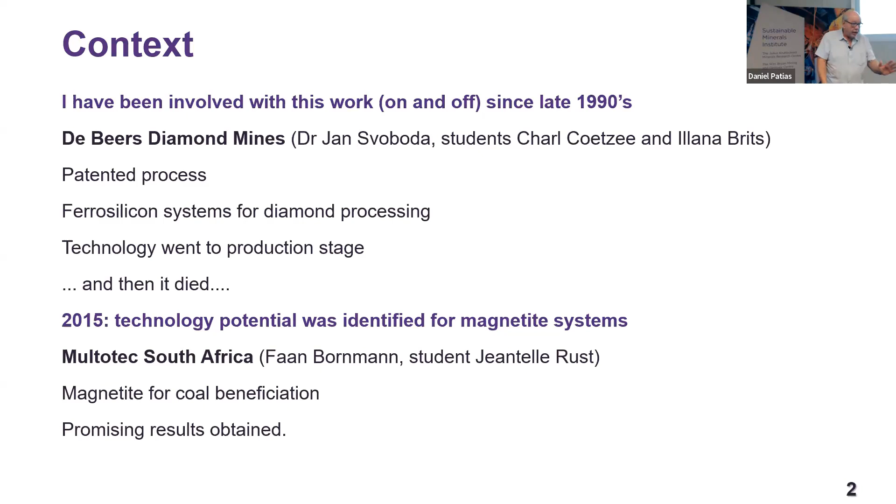And then we started talking about ACARP, and ACARP we applied with the help of Christian. We applied for the project and it was awarded. And the project kicked off 2 weeks ago, and that's what I'm doing here at the moment.

We are going to pursue this, what we learned in the past. We're going to show that and distill that and refine that.

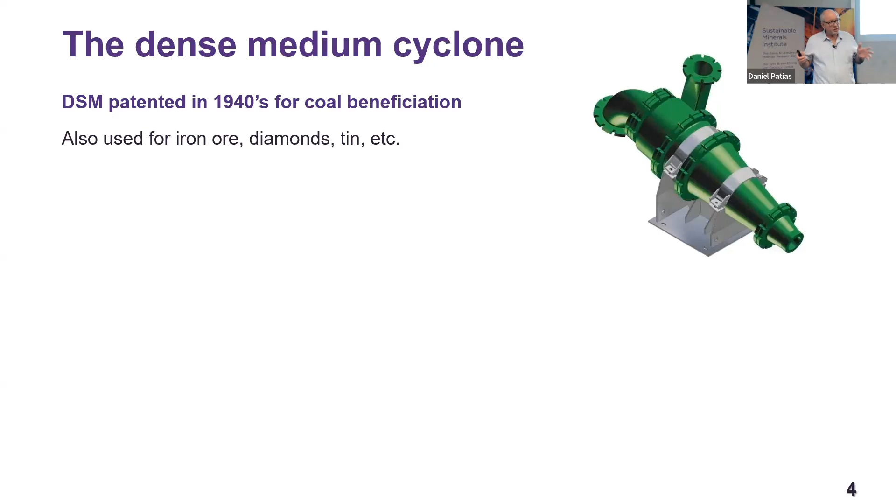Right, let's talk about the dense medium cyclone. Now, unfortunately, again, I see people here where I'm going to bore them with how a dense medium cyclone works. Hopefully, there are some people from other backgrounds who might not know all the buzzwords on a dense medium cyclone. Dutch state mines patented this in the 1940s for coal beneficiation, although it can be used for any dense separation or dense mineral separation based on density.

So let's, let me just see if I can, whoops, get the laser pointer going. There we are.

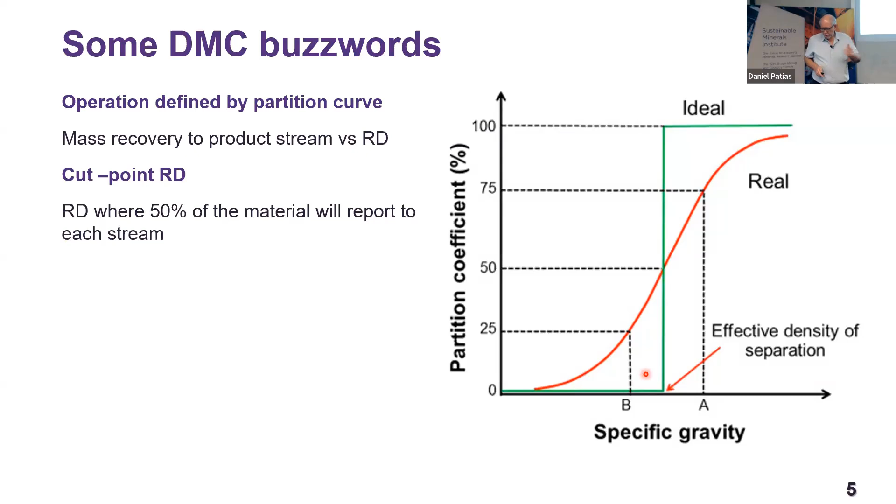So we've got various ways of defining the operation. The first is the cut point—that's the point at which 50% of the material, or material of that density, has a 50-50 chance of going either up or down.

The other is the misplaced material, which I've just shown you, and that can be defined by the EP. EP is essentially the slope of that straight part there, running between those two points, giving an indication of the sharpness of separation.

A small EP means the line is more upright—sharper separation—while a high EP means a low sharpness of separation. So a low number is good in this case, like a golf score.

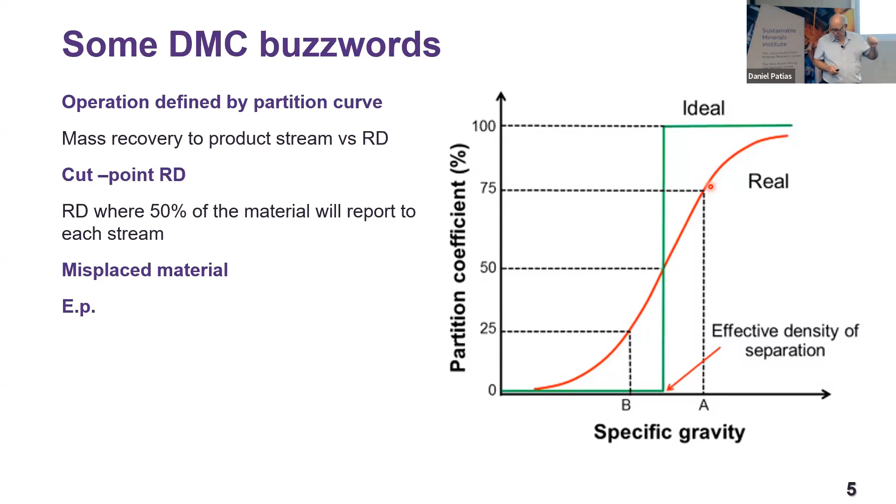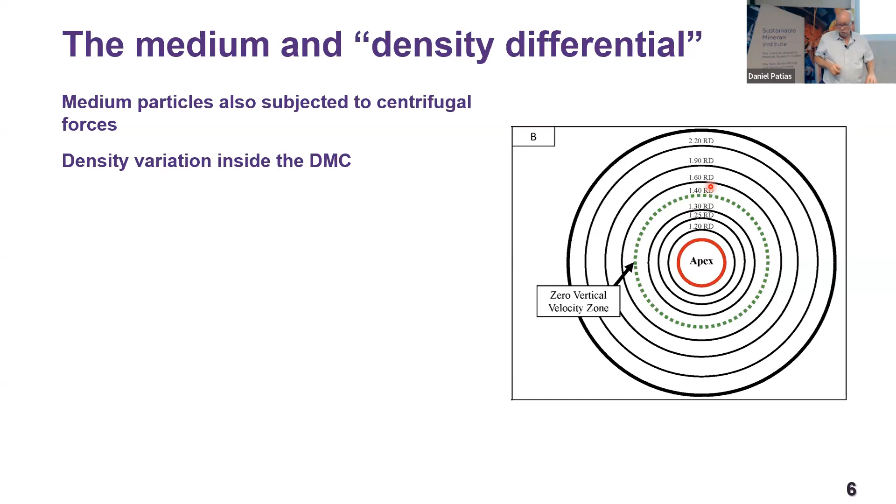Wear. That's what we found at the De Beers mines - there was a lot of wear in the cyclone because these middlings are just sitting in the cyclone, eating up capacity and not going anywhere. So there's this density variation.

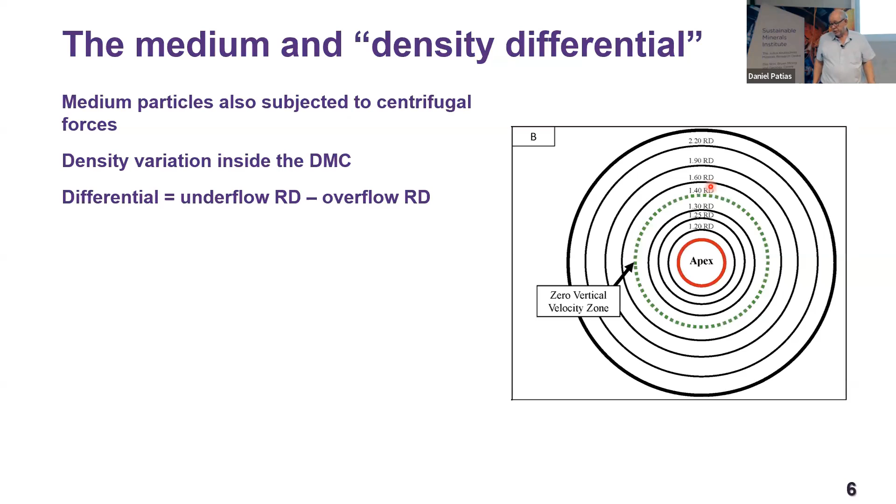Density differential formally is defined as the underflow RD, the high relative density, minus the overflow relative density. It's used as a proxy for sharpness of separation. Normal range is 0.2 to 0.5. If it goes higher than that, you've got a problem. If it goes lower, I believe you've got a problem too, Tim - you've got to help me on the low density differentials. But that is the normal operating range. And as I said, the middlings are trapped in that zone if the density differential becomes too large.

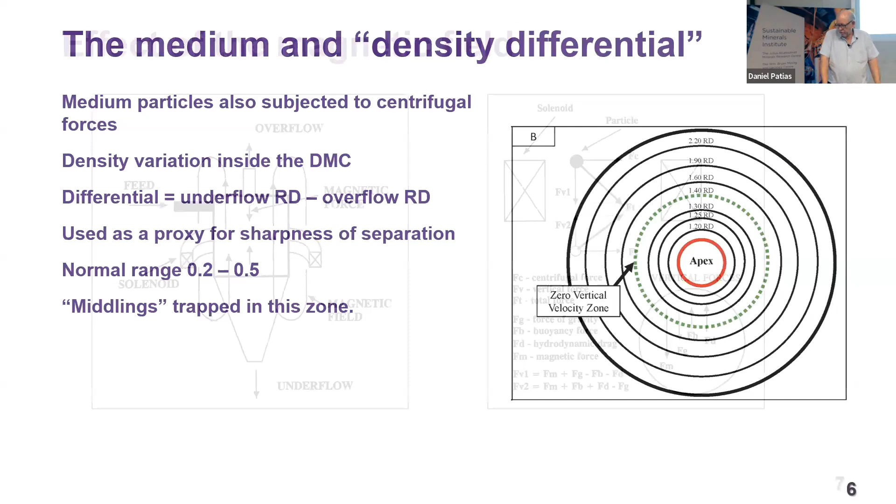Now what do we do with a magnet? This comes out of the first papers. What we do is take a solenoid, a magnetic solenoid or electromagnet, and stick it around the cyclone in some position - and the position is very important. I've drawn it here around the barrel, but actually it works best if it's a little bit lower down. We'll come to that.

That imparts a magnetic force on the magnetic medium particles inside the cyclone, and that gives you one additional control. It does affect it, and you can see the resultant force changes. So if I change the current going through the electromagnet, hence changing the magnetic field inside, the medium particles will behave differently. I'm hesitant to say better or worse, because that depends on what my setting is. So it gives us one more thing to work with.

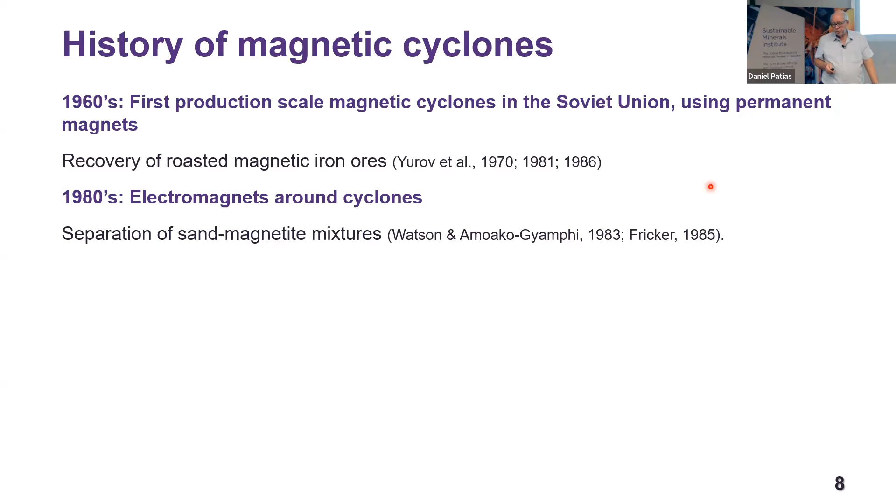What was found is that way back in the 1960s, they used a magnetic cyclone with permanent magnets in Russia, where they recovered roasted magnetic iron ores this way. They found that something happened - I'm not sure everybody understood what happened, but something happened. In the 1980s, sand-magnetite mixtures were separated using electromagnets for the first time. These are all the leads up to the work that we did at De Beers.

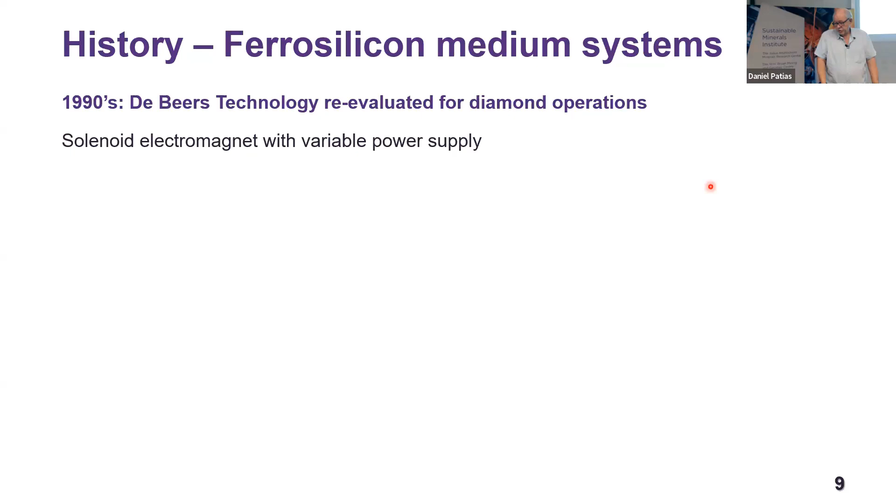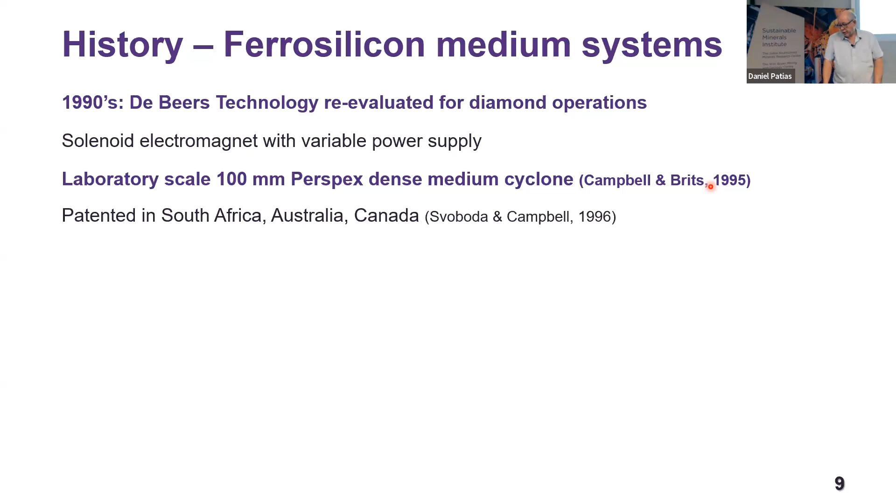So Jan Svoboda contacted us and said, listen, I've read about these things, can we try it? And we said yes. So we put a solenoid electromagnet with a variable power supply around, first of all, a 100 millimeter laboratory scale cyclone. I had a postgrad student there, and it was promising enough that we could patent this in three countries.

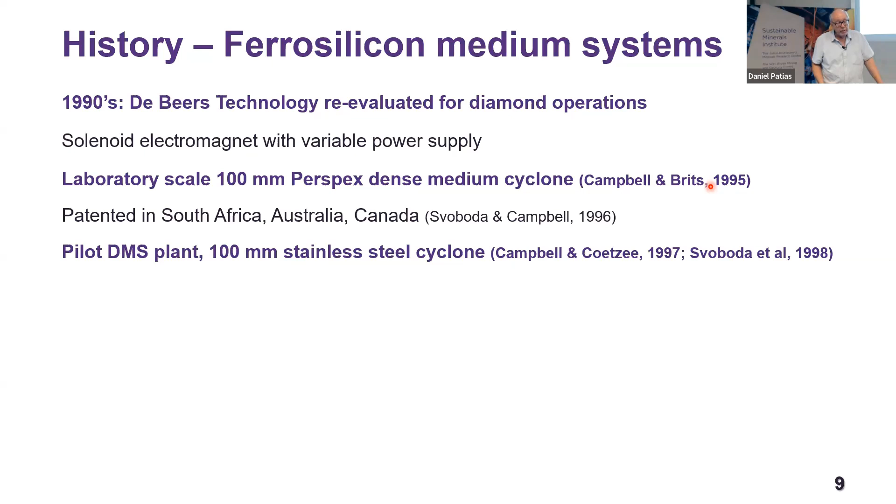Then we erected a 100 millimeter stainless steel cyclone at the De Beers campus in Johannesburg, and I had another postgrad student who worked on that as well. It's very important at this stage that your material of construction for the cyclone must be non-magnetic, otherwise it defeats the object. That's why we use perspex, polyurethane, stainless steel - and you'll see in the new cyclone how we manufacture that as well. We can't go with normal mild steel, and that's where the cost comes in. That's probably one of the issues to look at - the advantages versus cost of manufacturing, since it's not a bulk manufactured item, not for the bigger cyclones anyway.

Then this was implemented on the Koingnaas prospect plant. There was a bigger cyclone at 250 mil. It ran very well - again I had a postgrad student on that one, and it went to production stage, 510 cyclones, fairly big.

We manufactured non-magnetic stainless steel cyclones with ceramic linings. Once again, non-magnetic is the magic word there. And this ran actually very, very well. Similar cyclones were later used in the Botswana operations, and again it ran. And then for some reason, it just stopped.

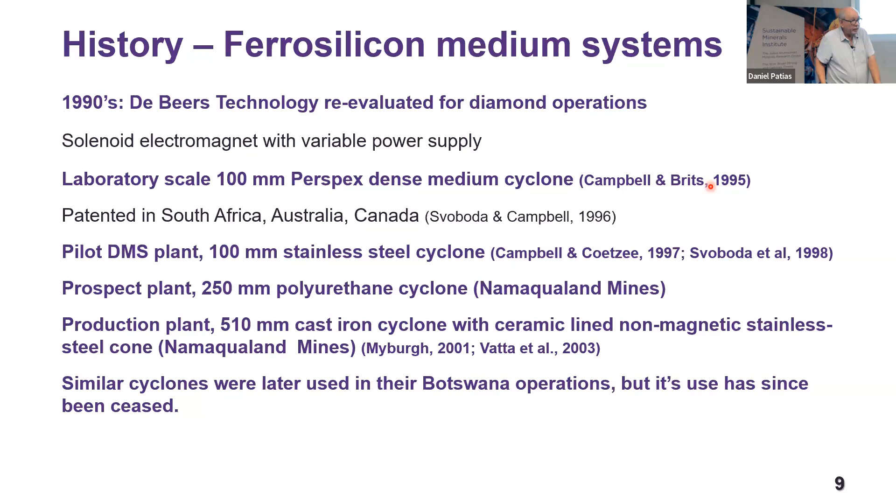I said just now, tongue in cheek, it's operator acceptance. I think it was more the cost of replacing these cyclones, because to have them made specially, I think that was one of the issues.

So the results were very, very interesting. We saw that the density differential could be directly influenced by the strength of the magnetic field, hence the amps that we put through there. And we tried the solenoid in different positions around the cyclone to see whether towards the cone it will work or not. All this work came out in a fairly nice report.

In fact, quite interesting, we could actually achieve density inversion at a very high magnetic field strength inside the cyclone, where you would have in your overflow a higher density magnetite than at the bottom, or medium at the bottom. Obviously, you don't want that.

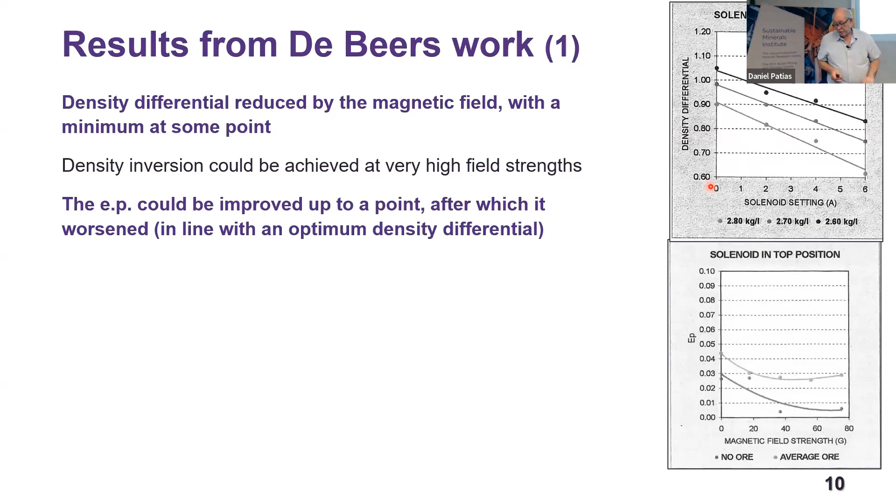So in general, up to a point, the higher the magnetic field strength, the lower the density differential, which is quite nice, because if you lower the density differential up to a point, you can potentially improve the efficiency. The EP could be improved as well up to a point, and that point where it goes back up again was actually, we suspect, the point where your density inversion started happening. So you could bring the EP down. Remember, EP, low number, high efficiency, or better.

We found that the optimum solenoid position was around the upper cone, and that's not surprising. In other words, that's just below the barrel section, cylindrical section, where the cone starts, because that is more or less where the vortex finder, the pipe that grabs the overflow, is positioned inside the cyclone. And I would think that is where most of your separation takes place. That's the hot spot where I can influence the separation.

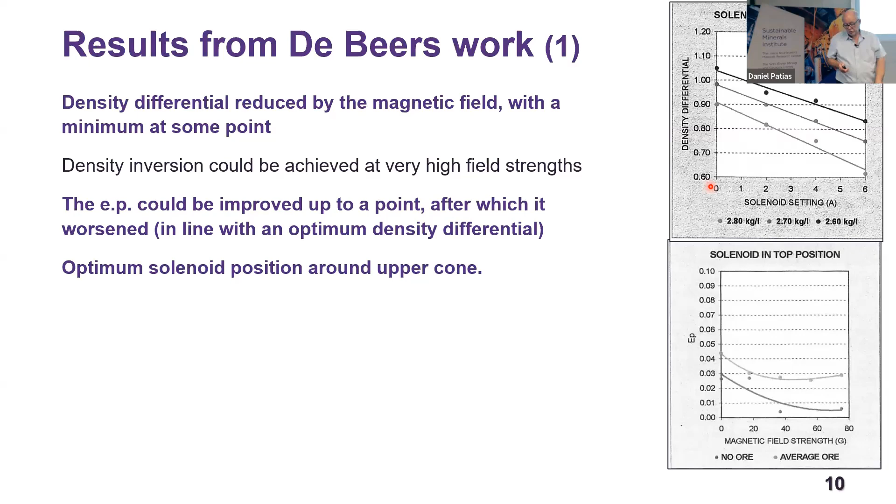If you move the solenoid up, you are beyond the vortex finder and nothing will happen. And if you're too close to the cone at the bottom, it doesn't really happen either, because your separation has already happened in the cyclone. The cone is really just a spigot, or the bottom part of the cone is just a spigot. So I think we found the sweet spot there of the position. We're not finished there yet, but I'll show you our design just now.

And this was interesting: the cut point lowered significantly with increasing magnetic field strength. Now, in the diamond industry, that's bad news, because you can lose diamonds that way if your cut point is too low. But for coal, we didn't even think about coal in those days. For coal, it's actually good news, because I'll come to the reason for that later on. So there is an effect on the cut point density. It's not clear, I must say, at this stage, and I'll come back to that.

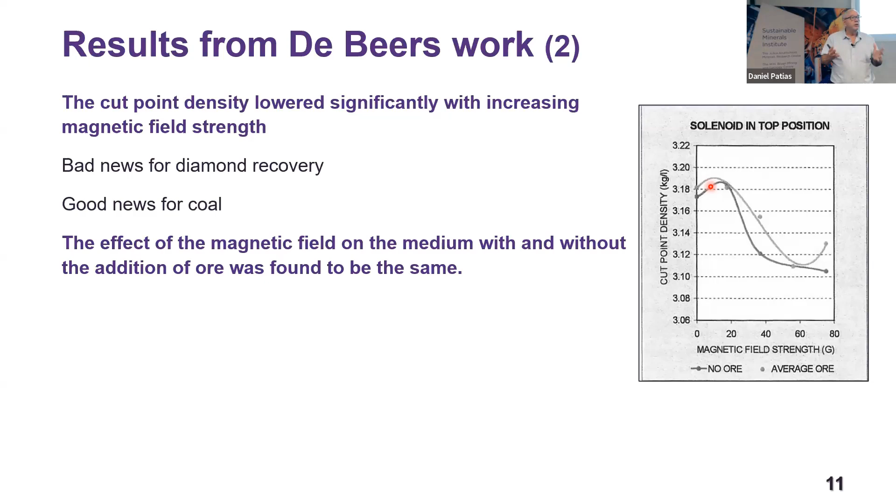Also interesting, just an aside: the effect of the magnetic field on the medium with and without the addition of ore was basically the same. So whether you just run a cyclone on magnetite or ferrosilicon medium, or whether you add the gravel or ore in there, the effects were the same. So the presence of any rocks in there didn't have an influence. It changed the numbers a little bit, but not the trends.

There was a recent paper from China on magnetite systems in coal beneficiation, which is moving in the right direction now, where they used a 150 mil polyurethane cyclone in a closed circuit. But for some reason, it looks as if they positioned the solenoid in the middle of the barrel section. And very surprising results came out, which I'll show you now.

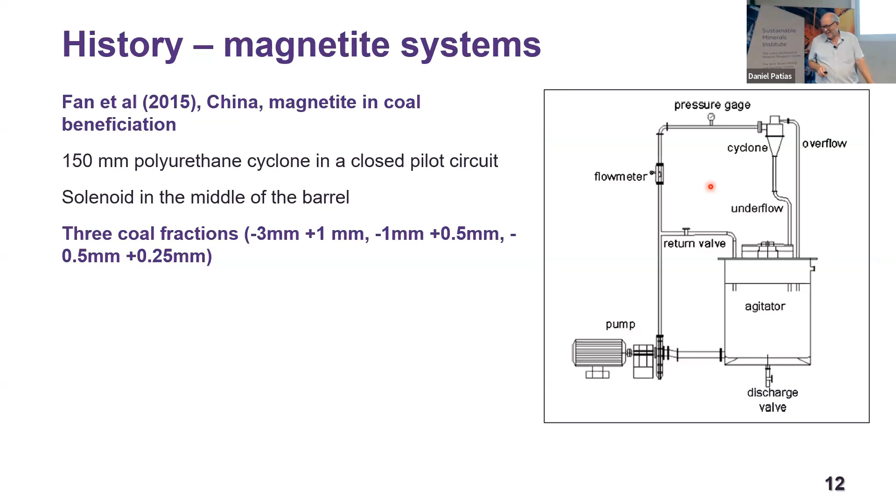They did a lot of work, and this is hard work. They used 3 coal fractions, and they did densimetric analysis on all those coal fractions separately. Now, I can tell you that to do a densimetric analysis on a -0.5 millimeter particle is just murder. It's very, very difficult, so I admire the guys for the work that they've done. Medium SG they ran was about 1.3 to 1.4.

They analyzed all the products, and this is what they found. First of all, you can see the lines. The black line on the curve is no current, no magnetic field, and as you increase it, it moves towards the green line. In all cases, we found an increase in the cut point.

Which is bad news now for coal, but good news for diamonds. But what you could find, and you've got to really look at this because there aren't a lot of points on these graphs, is that the EP seemed to have improved up to a point in all cases.

That's the problem with these partition curves. If you're going to do tracer tests or density tests, you must have a lot of data points in that upright part of the graph. Otherwise, it's not going to show a lot. You want more points there.

But in this case, it would have been difficult because you're limited by the density fractions you can analyze for coal. And that accuracy of the line gives you the EP. So the EP numbers here are interesting, but I'd take that with a pinch of salt - not saying it's wrong, just saying we should check that.

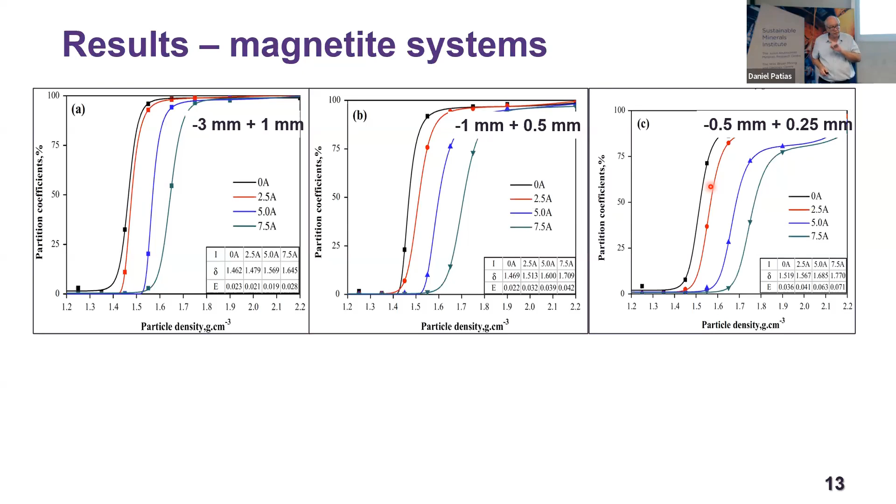So there was an improvement in EP, especially on the coarser sizes. The fine sizes, that's the graph on the right-hand side, is a bit of a difficult one as well. But there was an improvement, although there was an increase in the density cut point, which is what we don't want. My suspicion is that was the position of the solenoid.

Now, the most recent work, when we started getting back into the game, Multotec South Africa came up and said, right, we've got this rig, can we do some tests? And I said yes, got a postgrad student once again, and we started looking at magnetite systems for coal. The major objective of the study was really to look at coarser magnetite, and I'll come back to that one.

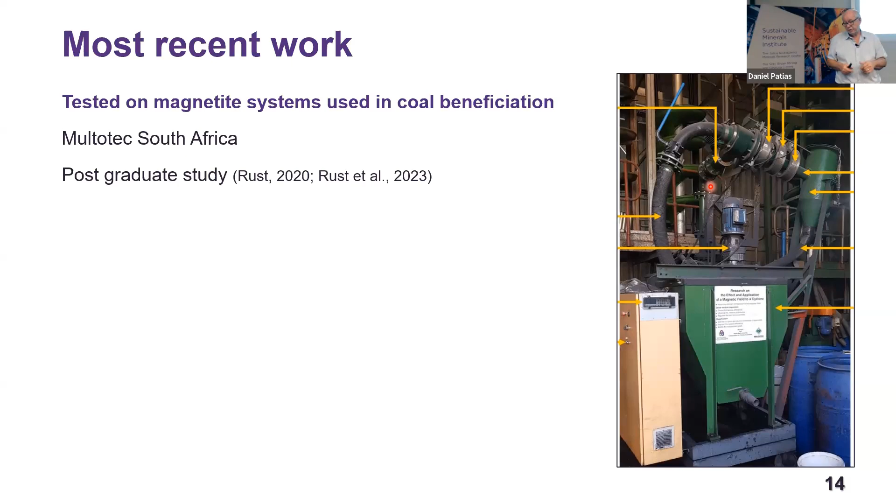Moving away from fine milled magnetite in the order of 90 micron and going to a coarser magnetite, which is much cheaper, and the losses are much lower because you don't have that much carryover. So there's economic benefit in that one. I'll show you what happened there.

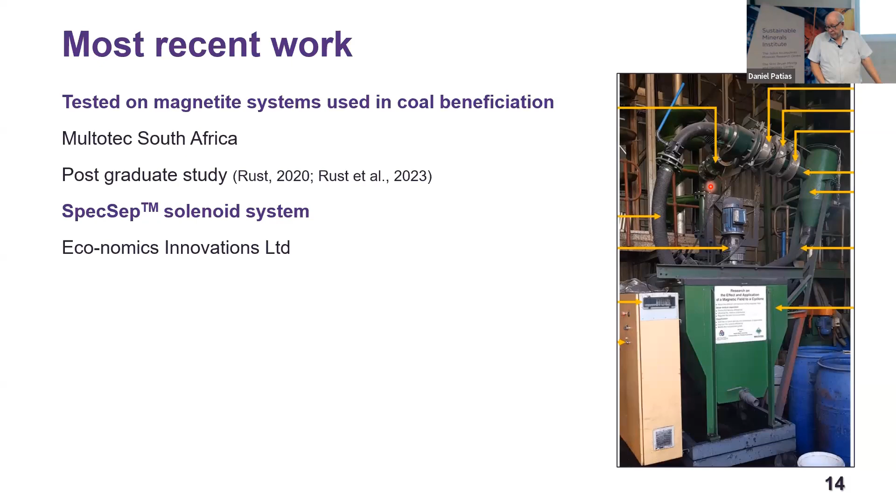In the meantime, Eco-nomics Innovations developed a SpecSep system, a solenoid system for this very purpose, and that's a commercially available unit. I'll show you on the next slide - you can see the solenoids around the cyclone there. So it was a pump-fed 165 millimeter polyurethane cyclone in a closed circuit.

Just zooming into that one, the red circle shows there are three solenoids in this cluster - those are the SpecSeps. And the reason we used three was it's easier to switch them on to simulate the solenoid being in a different position. So we could switch on and off and vary the current through each of those independently and look at the effect of that. Otherwise, it's a standard messy old cyclone.

Very difficult. Maybe at this point, I must show that you've got the overflow pipe there - that's the overflow going in there, that's the underflow, that's the overflow. And to sample there is almost impossible. It's a bucket - you stick your bucket in there, you run away with it, and you're full of magnetite. Magnetite takes about a week to come out of your system, your pores and your ears and your hair and everything. Terrible stuff.

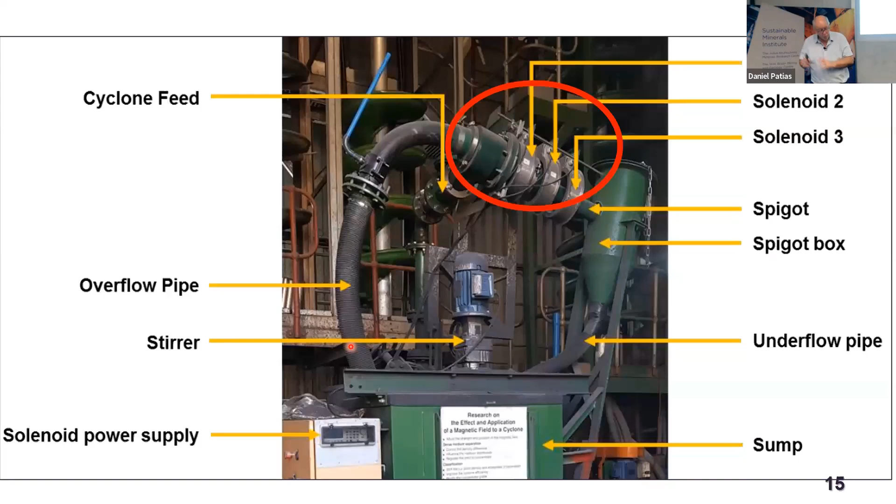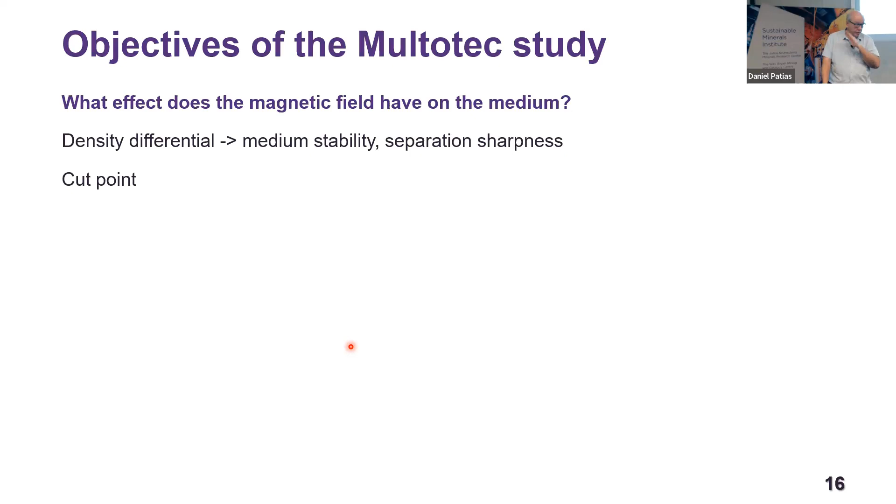So we couldn't do a lot of accurate work there, but at least we could measure the densities. We couldn't measure the flow rates. And we did some tracer tests on this as well, which was pretty hairy, but it worked. The objective was really, are we seeing an effect in the density differential? Because that was the easy one to measure, and hence, by proxy, the separation sharpness - can we change this, the cut point, if we use tracer tests for that?

And the important one was the coarser magnetite. You compare the magnetite D90 of 90 micron and the coarser one of 300 micron - is there a difference? Can I offset the bad habits of a coarse magnetite? Because again, coarser magnetite is back to stability - coarser magnetite will have better settling. If you take a bucket of magnetite solution suspension and put it down, the coarser the particles, the quicker they will settle. So you've got the stability thing as well.

That's not good for a cyclone - you want it fairly stable. That's why people use very fine magnetite and not coarse magnetite for this. But there was a claim made by the manufacturer of the SpecSep that you can actually go to a coarser magnetite.

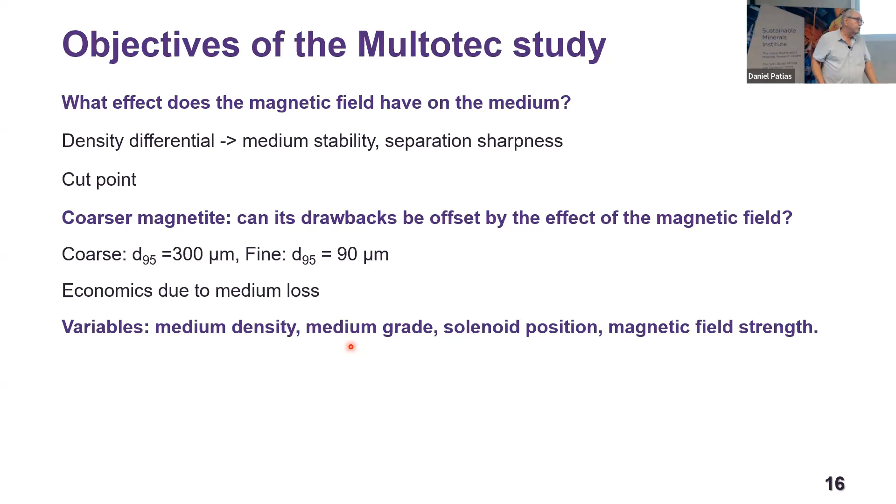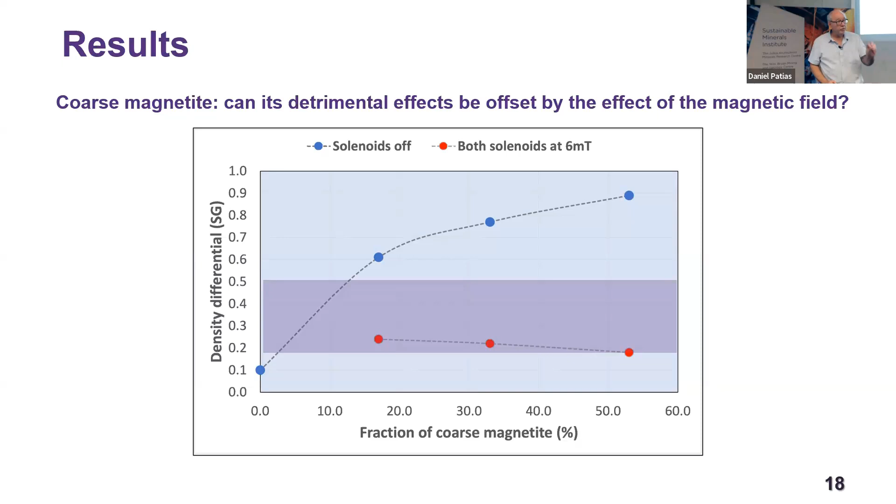And then we started adding in fractions up to 50% of the coarser magnetite. If you didn't have the solenoids on, the density differential would just shoot off and become much too high. But if you had the magnets on, the effect of adding coarser magnetite didn't make a difference. That shows you can probably move away from the ultrafine magnetite into coarser fractions. So that was good work there.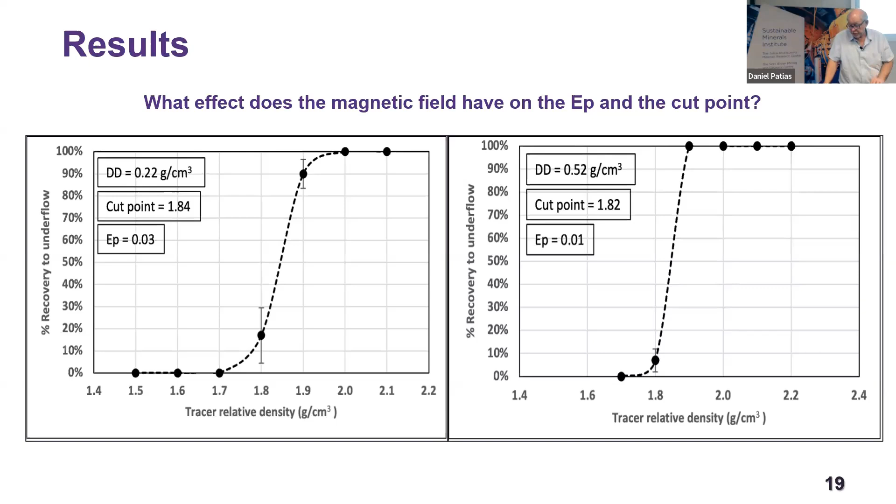The purpose of these two is that I can run the same efficiency with a coarser magnetite. I think this was a 40% mix of the coarse to the fine. I can run that efficiency, or I can run the cyclone the same way by just using coarser magnetite. EP was actually improved, and the cut point stayed the same at least, if not dropped a little bit. So we haven't quite answered that cut point question yet, but we know that we can use coarser magnetite - that was the main purpose of this study.

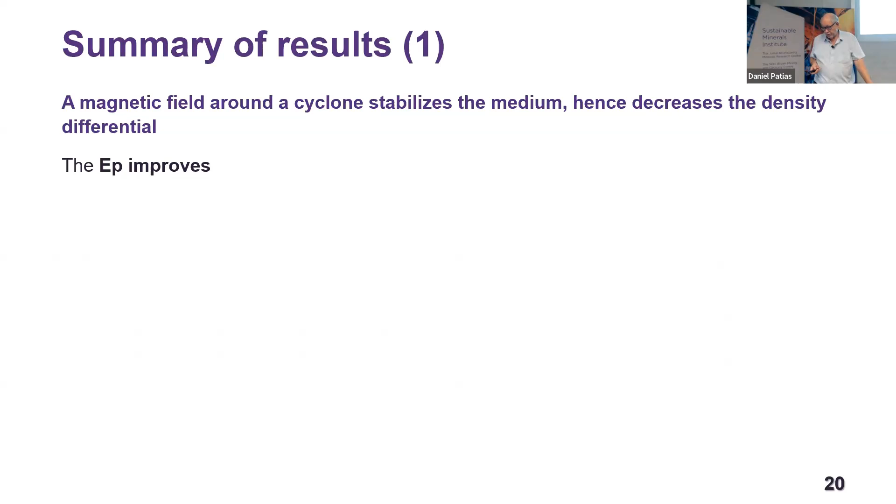So the summary is that a magnetic field around the cyclone stabilizes the medium, hence decreases the density differential. EP can improve. Cut point, I'd say, can be influenced - I don't know whether it goes up or down. It looked like it's going down because of the De Beers work that showed it went down. But the exact sensitivity is still unknown.

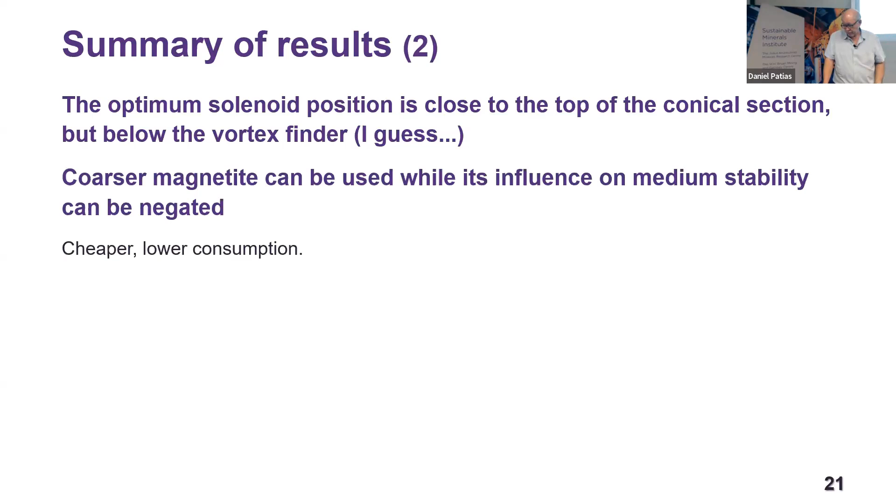And that is exactly what I'm doing here, and that's what we're going to do in the ACARP project. So the optimum solenoid position - I think we've got very clear where that is: top of the conical section, but not beyond the vortex finder, the bottom end of the vortex finder. And then, very important, the coarser magnetite can be used - cheaper, lower consumption.

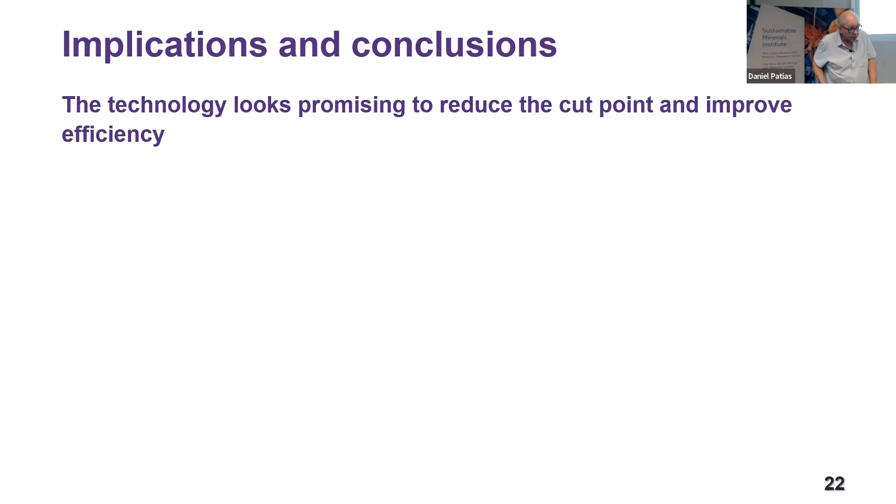So implications and conclusions of this work were that the technology looked promising to reduce cut point possibly, and to improve efficiency, or at least reduce your cut point and keep the efficiency the same, which is probably good enough for us. But more work is required - we need to fine-tune these things, we need to optimize that position a little bit more, although that's secondary.

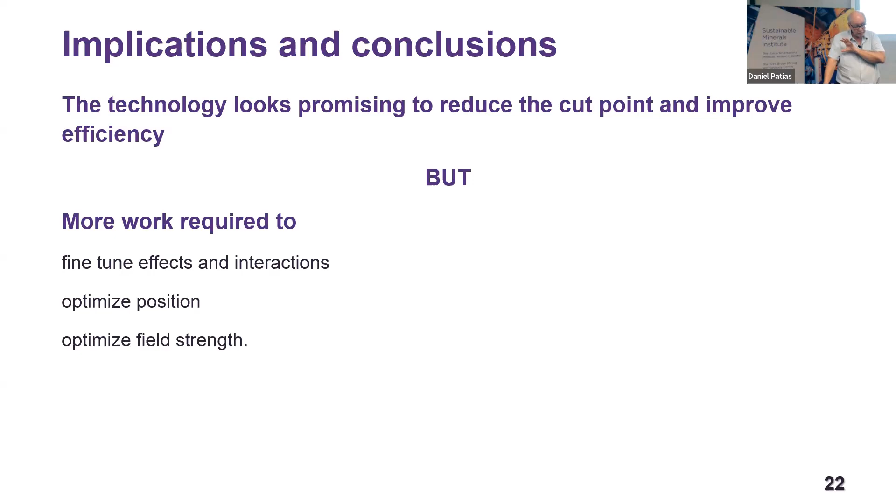And the field strength as well. We have to decide whether other operating conditions affect the field strength or the optimum field strength. And that's where the ACARP project comes in.

We know that the Australian coal industry wants to move away from thermal coal into metallurgical coal or export coal. The reason for that is that it's a much cleaner coal with lower ash forming minerals, which means that coal product has a lower density than thermal coal.

Thermal coal, you can put any old rubbish into a power station and it'll burn it. It'll heat up the rocks and cool them down again, which is why you make such a lot of CO2 for nothing. But if you've got a cleaner coal, you can actually have more usable energy going into the power station or metallurgical processes. So we want a lower density, and therefore we want a lower cut point.

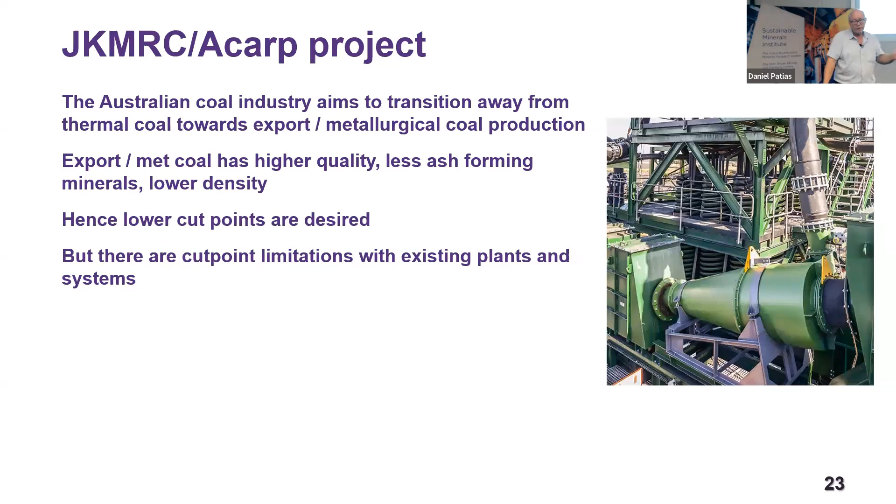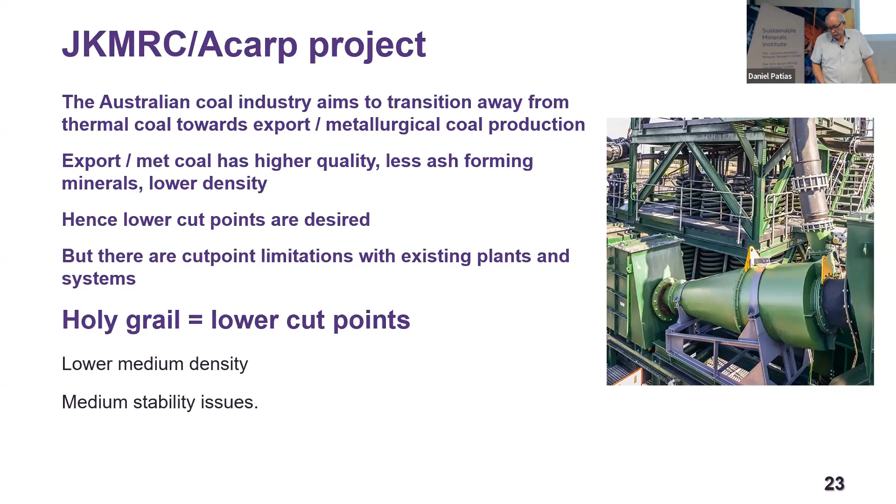That's what we want, a lower cut point. There are cut point limitations with existing plants. You can only affect the cut point so much before you run into stability problems, or the geometric design of the cyclone will limit you. So the holy grail is to lower the cut points, and that's what we're chasing - lower medium density and the stability issues.

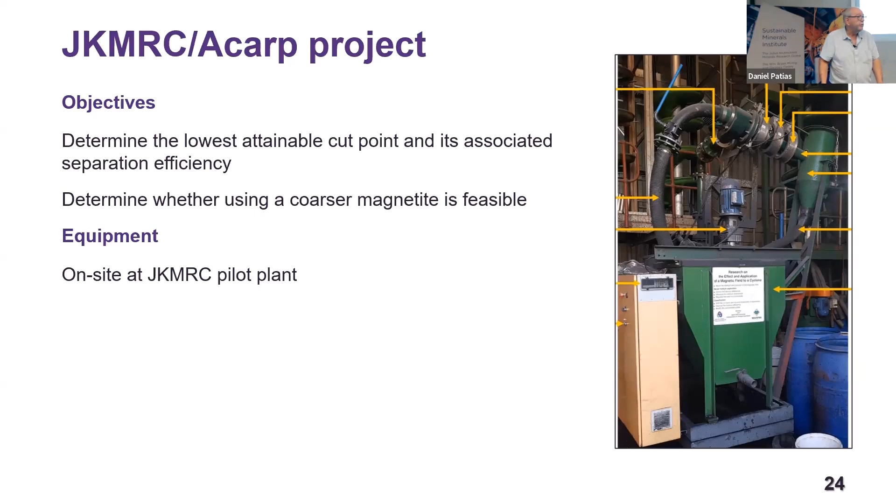The equipment, this plant from Multotec, has been shipped over and it's sitting at Multotec Australia. They're busy rewiring it and getting it certified for installation here at the JK in the pilot plant downstairs, and we're going to start on that.

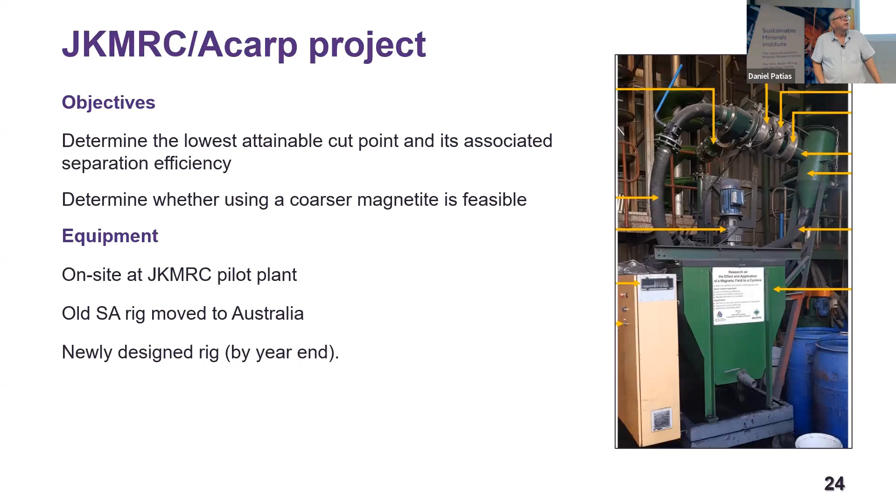So if you see this funny beast standing down there, it's mine. But Multotec has already said they are designing a new rig for us, a couple of these, and that's what it looks like. It's a huge thing, 3-4 meters high. I don't think Mitch is going to be too happy to have this thing sitting on his front porch, but we'll talk to him nicely.

This is a proper installation. It's big, it's got a big enough sump. The sump is well designed, and very important, is where you have your overflow and underflow.

There's going to be a sampling trolley there on wheels, and you can actually move out a trolley and the samples are taken, diverted into buckets or whatever, and push it back again, so that you can do proper sampling at the same time, overflow and underflow at the same time, because there is variation in a cyclone operation. And also you can do flow rates on that, bucket chemistry.

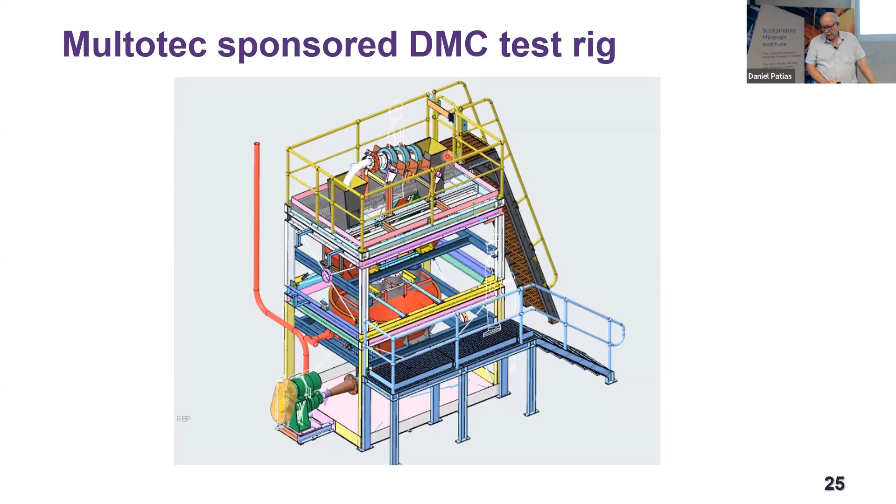The nice thing as well is that we will build in sieve bins there, or baskets at least. We're still planning on that one to capture tracers, so that we can do proper tracer tests as well. Come back to the tracers now. I'm very much looking forward to this new rig that will appear here towards the end of the year.

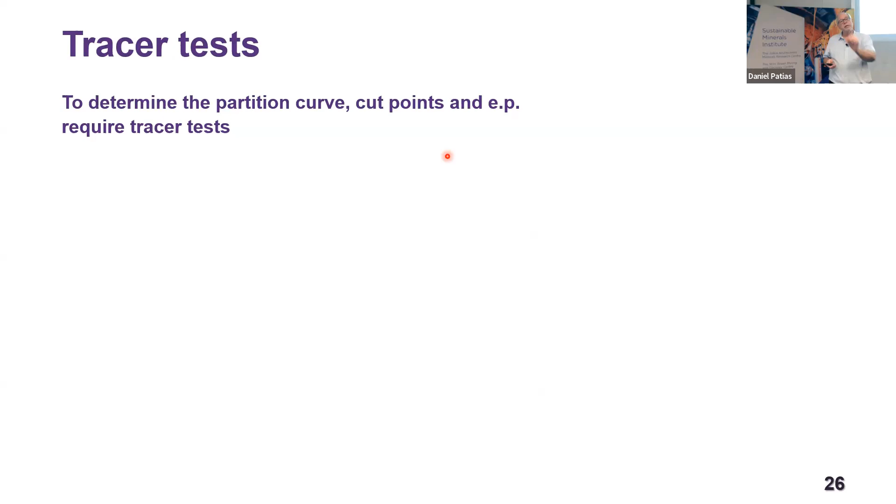On tracer tests, to determine cut points and proper partition curves, you need to have tracers. You have to have some sort of indication of density particles and where they land, up or down, and how much of it goes up and how much goes down.

Traditionally, one would use plastic tracers of different densities. These things are color-coded, and you get them in different sizes. Different colors mean different densities, and you just chuck them into the cyclone and they will go round and round, and you catch them, recover them by hand with a sieve, wash them, and sit there till 12 o'clock at night counting tracers, which is very tedious because a lot of these colors are the same.

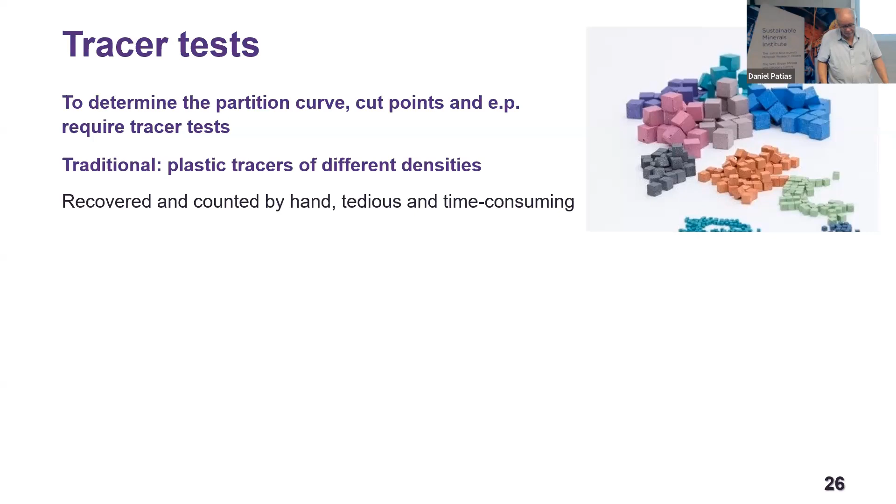We've got the guys, Chris and Ryan from Partition Enterprises here as well, who are experts in this, and they can attest that counting tracers is not the best way of spending your evenings because of this - very, very time consuming. So we came up with a new suggestion, and that is the radio RFID tracers that we are looking at.

There's a radio transponder embedded in each tracer. They're all the same color, it doesn't matter. You've got different densities, and coded onto this radio transponder is the density of that particular tracer. Then you have sensors that you can place anywhere, overflow, underflow, that picks up if the tracer comes past, and that tracer tells us, listen, here I am, I'm a 1.65, and you register that. The partition curve is then just, if it's a closed circuit, the same tracer goes around and round.

You only need a handful of tracers because the same tracer will do the same job. If it's a near dense tracer, it'll go up 3 times and down 7 times, so you've got your 70% from the same tracer. I'm very much looking forward to that work. It's more expensive, of course, but you need fewer tracers because you use the same tracer that goes around and round and round.

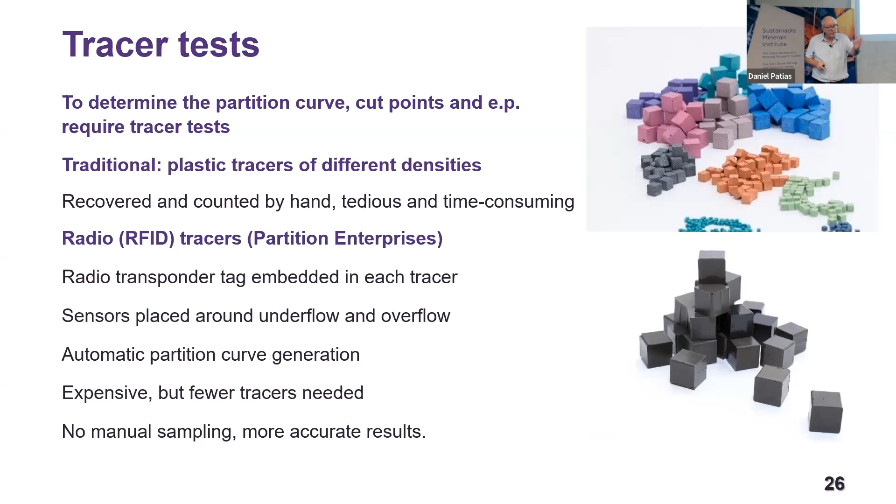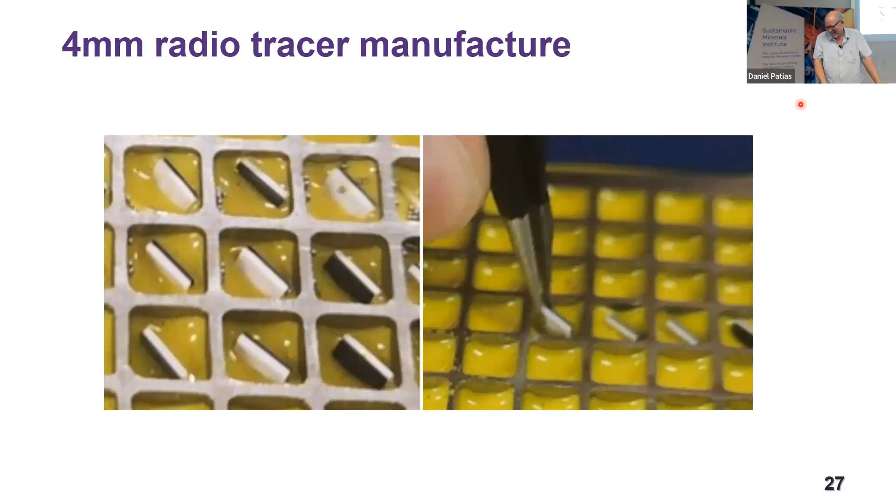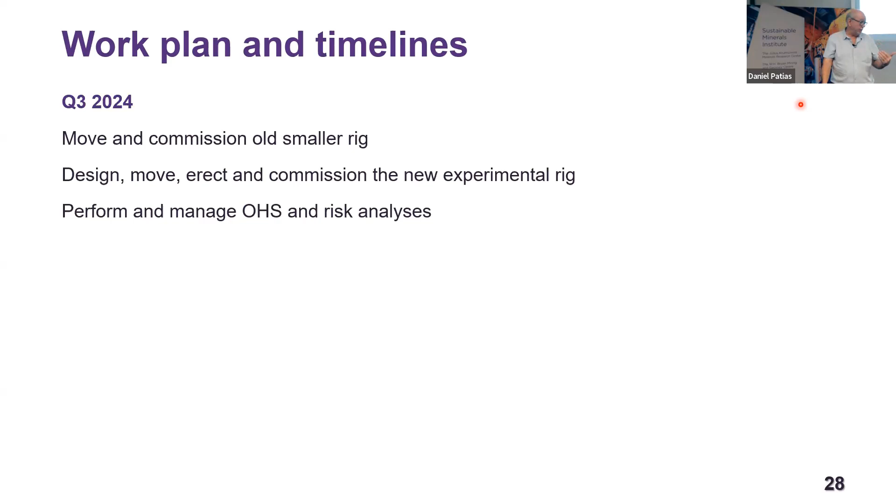Just finally then, on the work plan and the timelines: Q3, where we are now, move and commission the old rig. It's here already, it will be on site in the next 2 weeks. Then we'll do the OHS and risk analysis on this. We've got a lot of experience in South Africa running this thing, so it's really just adapting those conditions to the Australian ones. Q4, we will start testing.

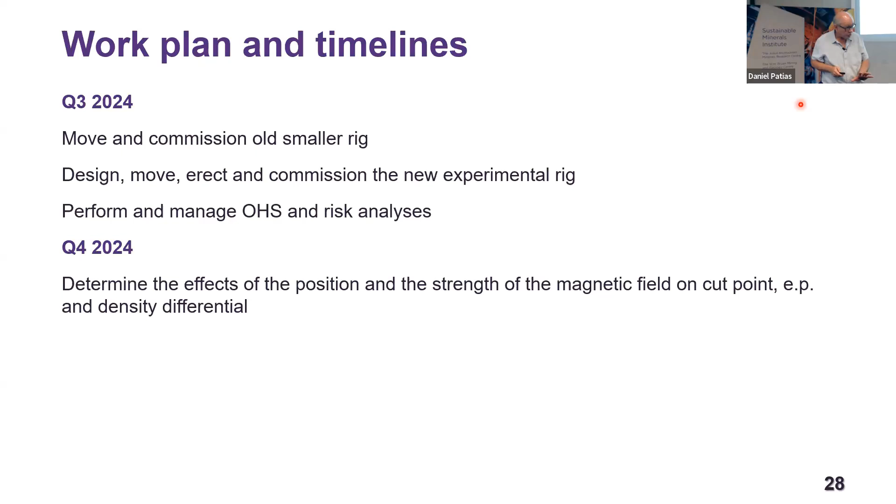We've got the magnetite coming from Martin and Robson, I can just give them a call and it'll be here in 2 days. Then we'll start again, repeating a lot of the Multotec work, because I want to confirm that it wasn't - I'd like to see that again - the magnetic strength, as well as the position on the density differential, for starters. Hopefully we can do some tracer tests in this old rig. I'm not putting my mind on it, but if we can just at least get the density differential effects sorted on the new rig, on the old rig, then I'll be pretty happy.

Going into next year, we should get the new rig commissioned, and we can then optimize the lowering of the cut point. Then we're going to play with this thing. You have a setting, you play around and see whether - and you can do that virtually online because the tracers are going around and they're being cut - you can turn the dial and see how your partition curve is going to change. If not, we've got plan B.

By Q2 next year, we are going to check this coarsening of the magnetite effect, see whether it actually works, and see whether there is any merit in moving away from the ultrafine magnetite to the fine grade. Strange, they talk about ultrafine, superfine, and fine - those are the 3 grades you get. Then this time next year, the project should be concluded. Final report submitted, and then I'm on my aeroplane back to North-West University.

Depending on our results, we would like to ask for a continuation of the ACARP project. Hopefully move this rig to a site, a coal mine, and then take a bleed off stream from coal and run it on real coal as well, because we're not going to handle coal here - only the magnetite tests. The logistics of running real coal: you've got to have 5 tons of coal in the feed, and then 5 tons of rubbish coal that you've discarded, and the logistics are just getting a bit bad there. So we're not going to do that to simulate the plant conditions.

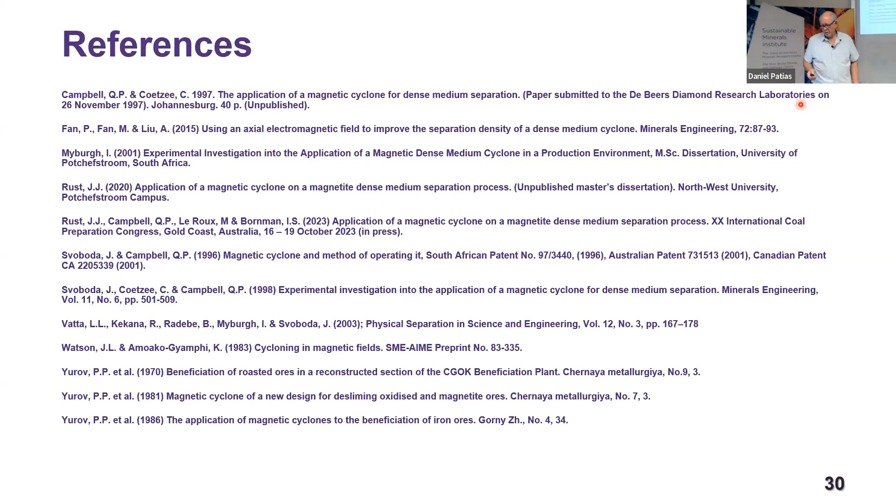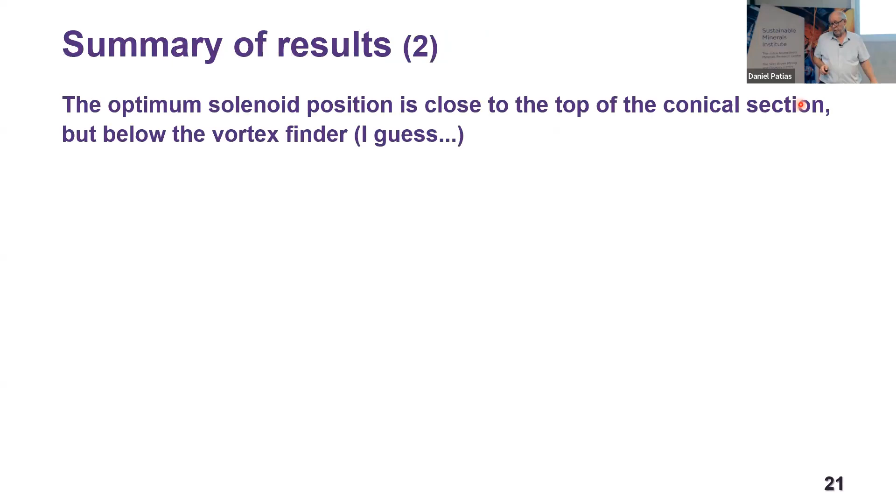So I was just thinking, is there a size fraction threshold for diamonds, for example, where it's not feasible to do the test anymore? Because I work a little bit with diamonds, they were like 200 microns, quite small, and I'm curious how it would behave.

Yeah, on diamonds there is normally a bottom cutoff size that's established through company techno-economics and that sort of thing. But for coal, it doesn't really matter. Fine coal is problematic to work with because it's wet, and to dewater fine coal is extremely difficult - it's like a mud, like a clay. To dewater coarser coal is easier, and you have to dewater coal, you can't send wet coal into a power station, it's just eating up the energy. So normally plants would actually discard the ultrafine coal because it's too difficult. I wouldn't worry about the -5. There are technologies looking at the -5, yes, but in practice at the moment, anything below 1 is dicey whether you're going to make enough money to introduce the technology there.